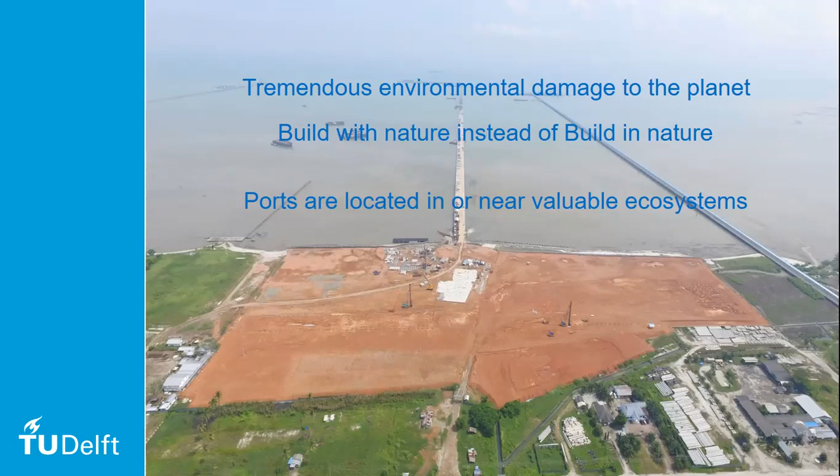At the section Ports and Waterways at the Delft University of Technology in the Netherlands, we carried out a case study to investigate the viability of nature-based solutions. This was carried out as a part of a master's study. The photo of a jetty under construction is from this port project.

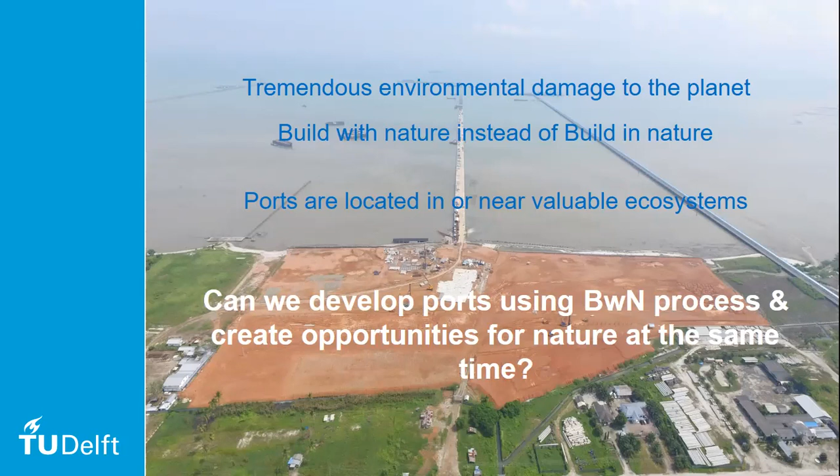So what is building with nature? It is an alternative design approach developed by EcoShape. Now, EcoShape is a joint initiative of contractors, engineering companies, research, governments, NGOs, and it focuses on using the properties of natural ecosystems to develop solutions in harmony with the natural environment. It creates opportunities for nature and lets nature also do part of the work.

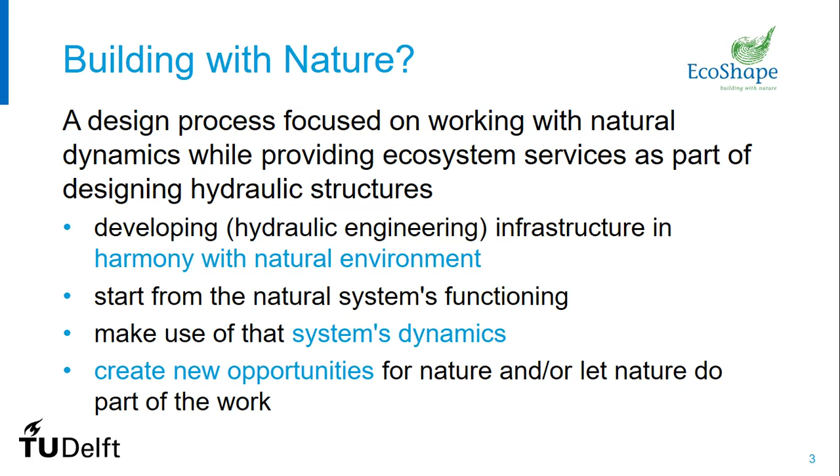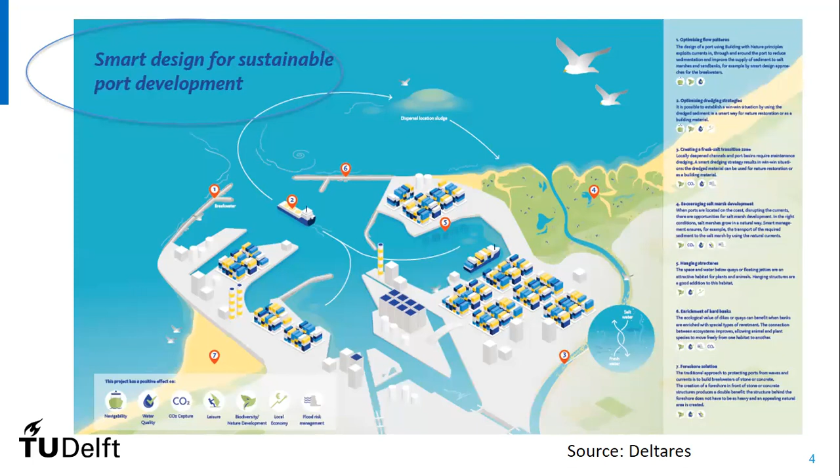Here you read smart design for sustainable port development, and indeed using nature is smart. It is smart to widen the solution space by studying and understanding the physical and ecological system. This is more likely to result in solutions aimed at balancing people, planet, and profit. In other words, more sustainable projects, more acceptable to the project proponents and environmental stakeholders.

This brings me to the case study. We chose a case study in Indonesia, where the government had announced 24 port projects to be conducted in the future. The port of Kuala Tanjung is situated in North Sumatra on the Strait of Malacca. It is planned to be a large port industrial complex, and when finished, it will be the second largest port in Indonesia. The port is being built by the state-owned port operator Pelindo One, together with Port of Rotterdam Authority from the Netherlands and a Chinese port operator.

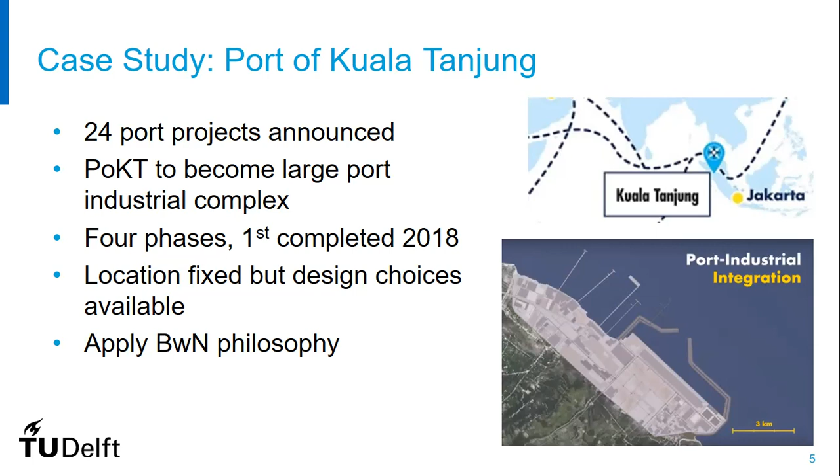So when we started, the project was already in the initiation phase. There was an existing master plan. The project had 4 phases. The first phase was a multi-purpose terminal, which was already completed in 2018. The second phase is the development of a huge industrial estate. The third is a container hub, and the fourth one for further urban development. So though the project location was fixed, we had enough design choices, enough degrees of freedom to examine the viability of a building with nature solution.

Some more about the project. The project involves dredging, reclamation to access deeper water, as well as breakwater construction. There is a river which has to be diverted, which means people have to be resettled. These activities, as expected, will have a massive, mostly negative impact on the surroundings. As you can read there, change in river morphology, water quality disturbance, subsidence due to groundwater extraction, disturbance of mudflats and mangroves, and so forth.

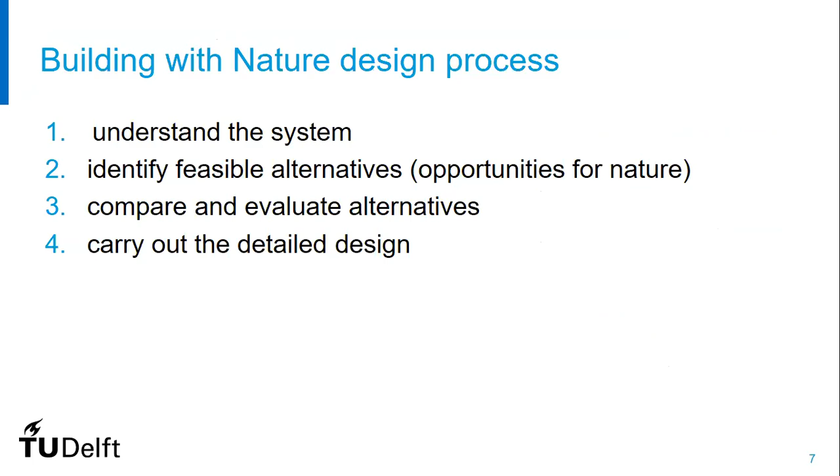This brings us to our building with nature design process. It is not very different from a traditional approach in these 4 steps: we understand the system, we identify feasible alternatives, we compare and evaluate alternatives, and we select one and carry out a detailed design. In that way, it is not very different. They're common to all design processes.

What is different is that we use the ecosystem and the environment as the guiding principle. We begin with a sound understanding of how the local ecosystem works, how it affects the port and its functioning, and we try to use system dynamics, the forces of nature such as currents and wind and plant growth. We even try to create room for ecosystem development in the port itself, if possible.

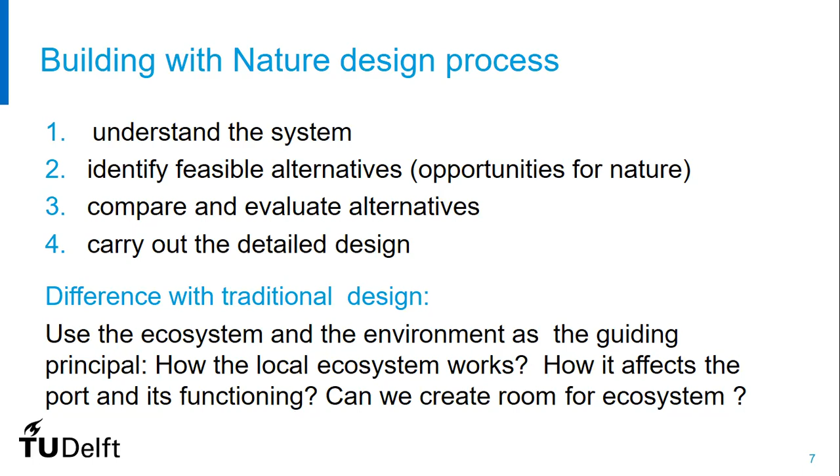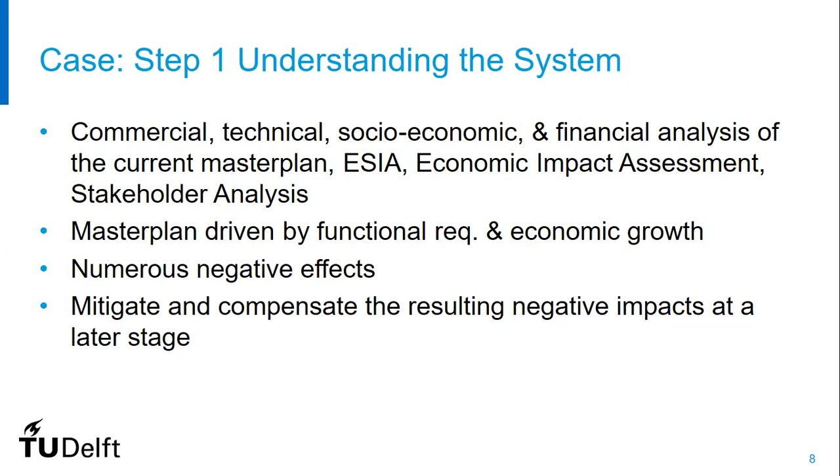So we went on to seek building with nature solutions. We started looking for opportunities, and that is also a part of step 1 of the building with nature design approach. In the current master plan, the breakwaters, the hard rubble mound breakwaters, form a major part of the capital expenditure. So we thought maybe these offer an opportunity to improve the current master plan by designing a nature-based alternative.

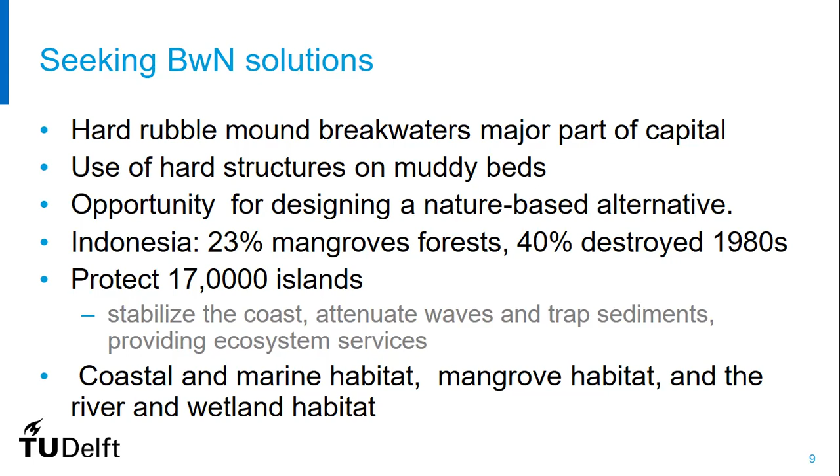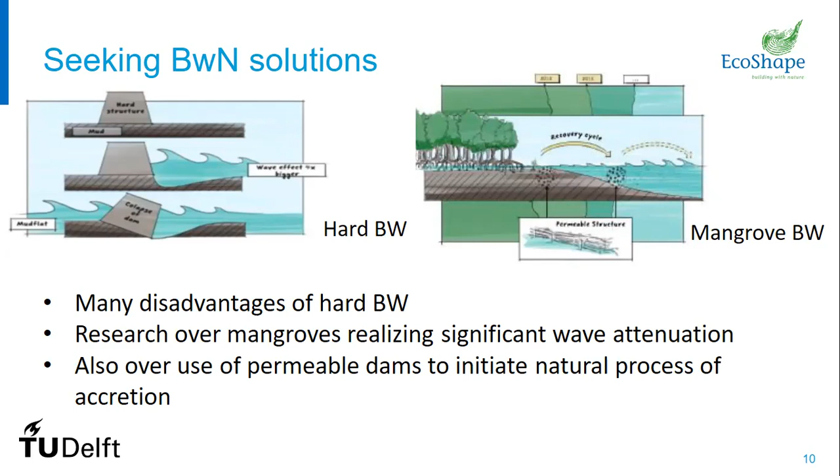There is a lot of research on mangroves ongoing, but a lot of practical applications are missing. So in that way, our study could contribute to that. This brings us to the next steps in the design approach. Two alternatives were conceptualized as shown.

The alternative on the right consists of terminals constructed offshore and connected to land by bridges. This avoids the diversion of the river in all phases of the project, minimizes the need for land reclamation, and limits the impact on the ecology of the estuary. However, creating effective hinterland connections for the port is problematic. The alternative is expensive, and in the absence of breakwaters, the downtime for the bigger ships, the break bulk and container ships, to be served in the final phase is likely to be unacceptable.

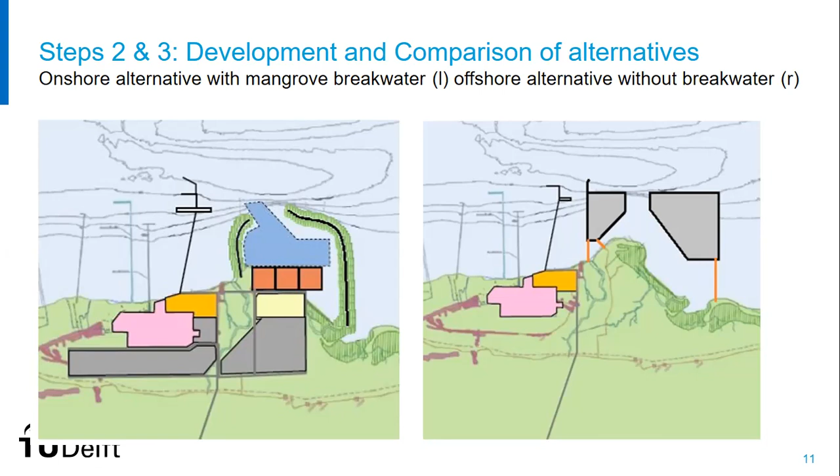On the left side is the onshore alternative, so all the terminals are located close to each other, providing the possibility of sharing utilities and cooperation among the terminal operators. And the focus in this design is on the stimulation and use of ecosystem services provided by the mangroves.

So our conclusion from the research was that mangrove protection can create a sustainable barrier which grows with sea level rise by trapping sediments. So the next step was to see, are the mangroves applicable at our chosen site? So we studied the conditions for natural establishment of mangroves at the selected location. What is important is the type of mangrove species, the time of the year, and the hydrodynamic conditions.

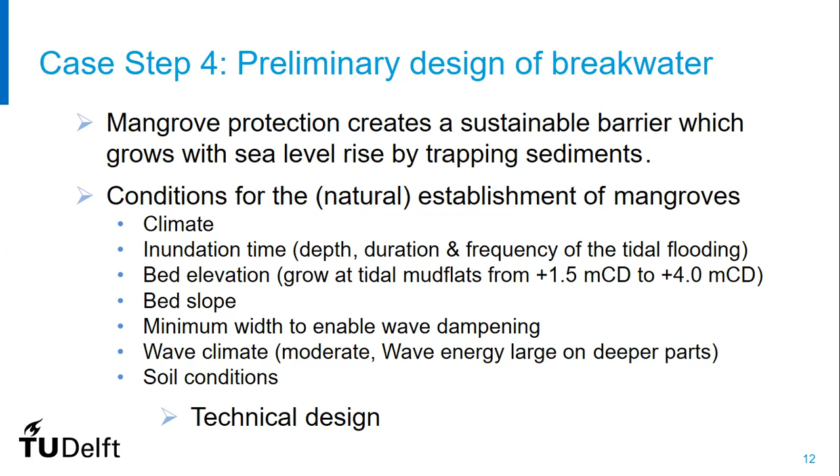These are the key factors in determining whether mangroves can grow, but also relevant factors are the climate, the inundation time, the bed elevation, the bed slope, minimum width required to enable wave dampening, the wave climate, the soil conditions, etc. So an initial assessment concluded that the conditions at the port of Kuala Tanjung meet the habitat requirements for mangroves to grow. Therefore, a breakwater where mangroves are integrated in the design to dampen waves and enhance nature at the same time was proposed. Having done that, we could go over to the technical design of the breakwater.

Below you can see the cross-section of the breakwater that we arrived at. We kept the location and the configuration of the mangrove breakwater the same as in the original master plan. In this way, there was sufficient data available on the bathymetry for the preliminary design of the mangrove breakwater, and all the technical requirements such as area requirements were met. And it was easier to compare with the traditional design, because that was our objective, to compare the traditional and mangrove breakwater design in order to make a convincing case for the decision makers to go for the soft alternative rather than the hard alternative. The breakwater itself is designed to grow naturally by accretion behind the permeable dams.

To initiate the sedimentation process, the stretch of land was artificially elevated up to 1.6 meter chart datum, and permeable dams were constructed. The dredged material, silty sand, is reused to create the right conditions for mangroves to grow. And at the deepest location of the breakwater, which requires an enormous amount of fill, the original hard breakwater will be used, but concrete blocks are incorporated to support habitat for crabs, shellfish, and fish.

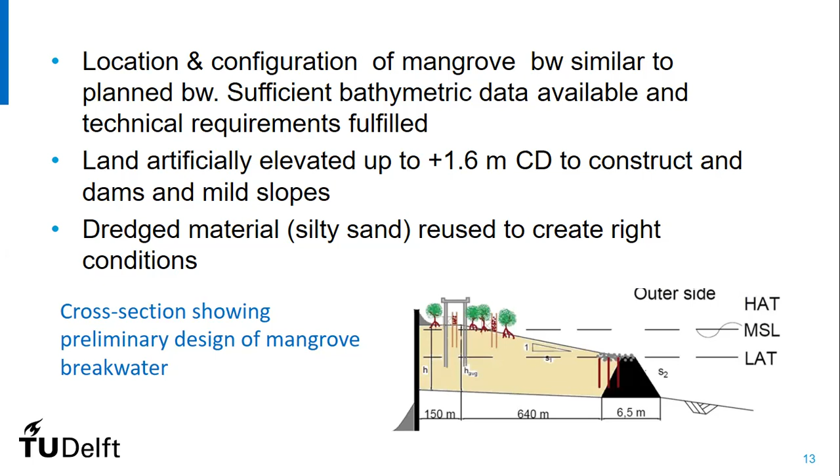So if we compare the traditional and mangrove breakwater purely on the basis of cost, what do we learn? Is it at all feasible to build mangrove breakwaters, even though a technically sound design can be made? The cost of mangrove breakwaters depends on many factors, including planting, placing permeable dams, and the transportation distance. However, excavation of fill constitutes a significant part of the cost. For an initial comparison, only the cost for supply and placing of fill material were estimated by multiplying fill volumes with a uniform unit rate. And this showed that the mangrove breakwater is about 25% more expensive than the traditional one.

But because it is largely self-sustaining and grows along with the sea level rise, the maintenance costs are likely to be lower in the future. And we should not forget that mangroves are a productive ecosystem. Many benefits can be commercially exploited. So if we make a business case for the long term, the project should reflect the direct, indirect, and intangible value created over the long term. This requires more research, but the likelihood is that the benefits are quite large.

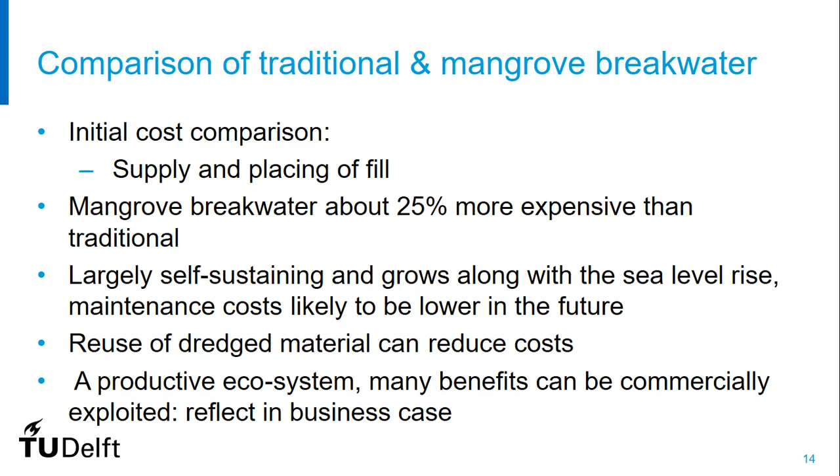In conclusion, we would like to state that the building with nature design philosophy guided us to identify opportunities for sustainable port development for the port of Kuala Tanjung. We examined the viability of the solution, and we find that in shallow ports, the concept of a naturally growing mangrove breakwater finds application. But of course, only if the site conditions meet habitat requirements for mangroves.

We also created a checklist with the habitat requirements for mangroves so that any potential port can have a look at this and assess if mangrove forests as ecosystems are applicable. And we think that using these methods, showing the benefits and communicating these to the stakeholders in an inclusive approach, the port can really benefit, and it's likely to get more support from all the stakeholders and the project proponents.